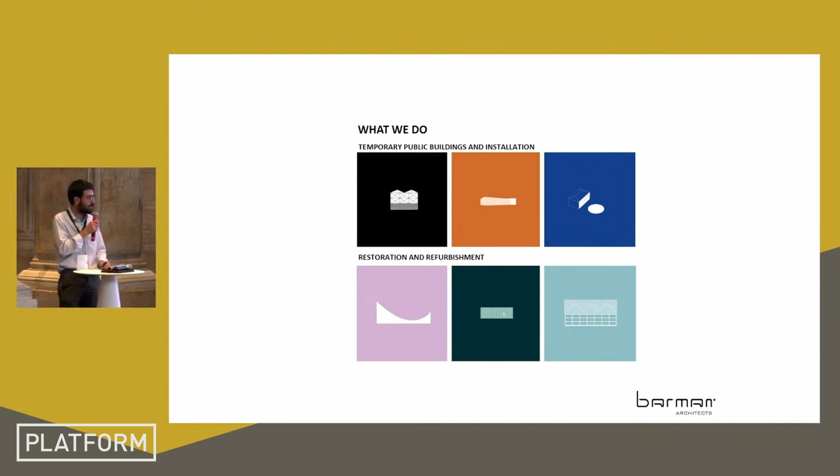My name is Giulio Mangano. I'm a partner of Barman Architects with Roberta Bartolone, who is on my right in the picture and in the audience there. We are a practice based in Venice, and our focus is mainly on temporary public buildings and installations and restoration and refurbishment projects.

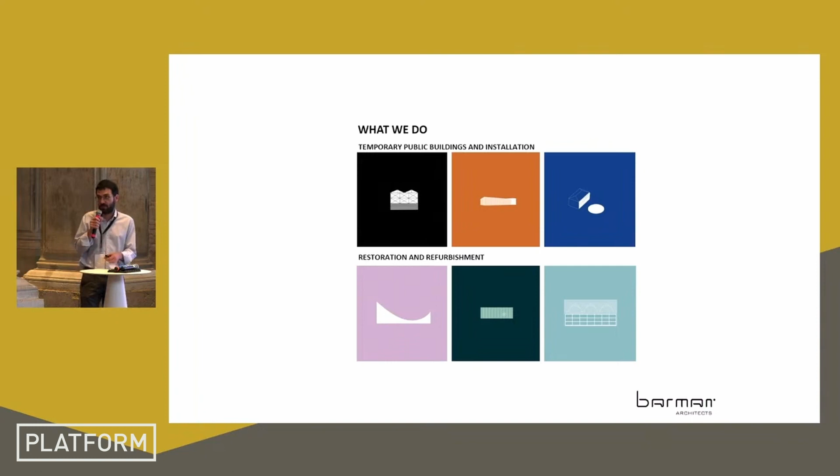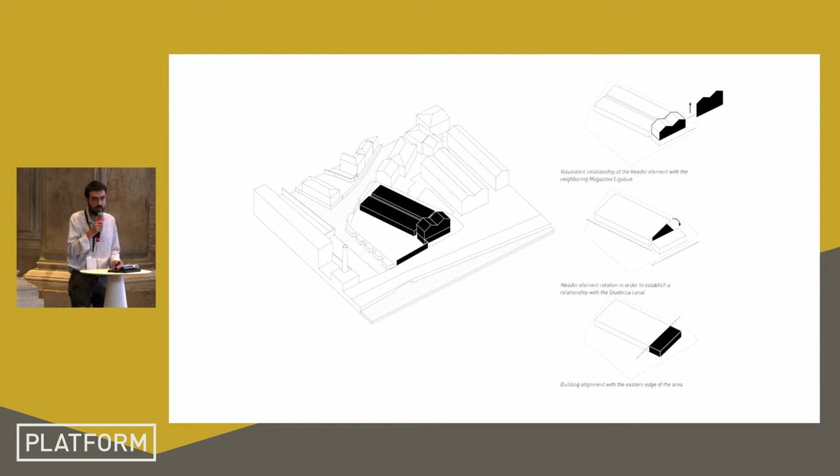Since the beginning and in our everyday practice, we deal with the theme we are today called here to speak about, like the new together. And in every project, as architects, when we approach a new building, we also come together with the limits of the project we face, limits and opportunities given by the clients or the users of our buildings, and the scale of the city.

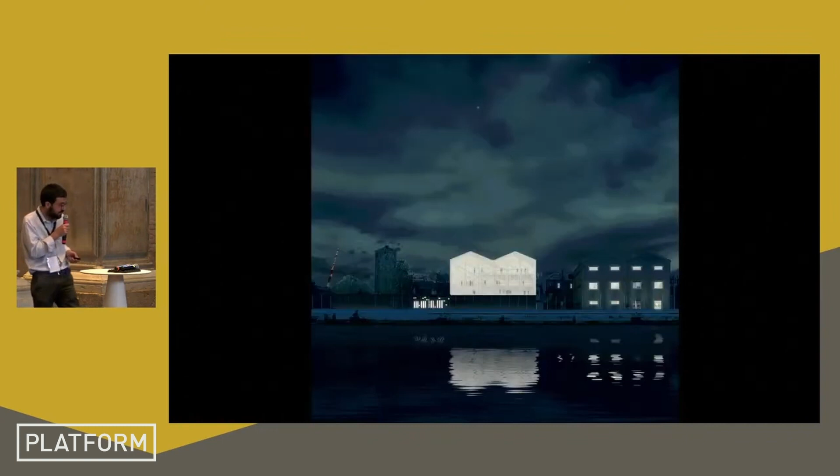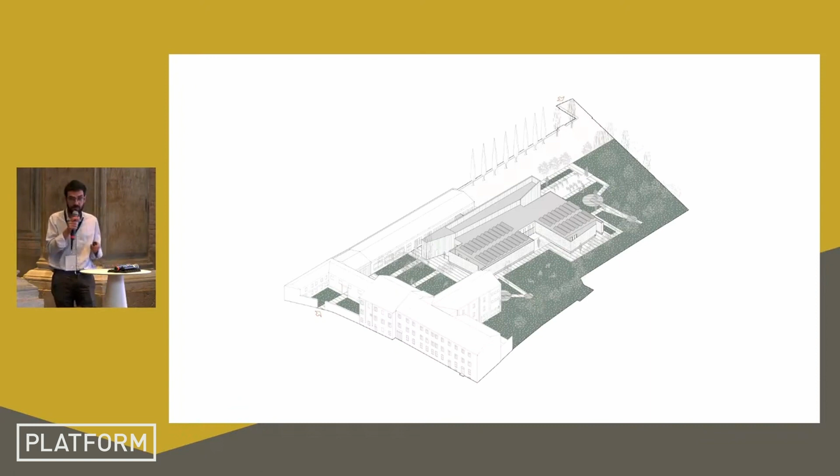And this is a project for a temporary campus here in Venice, done in 2017. And you see here a few pictures. And also the limit I was saying about history: we have to somehow be confronted with the history and the new use of the architecture we make.

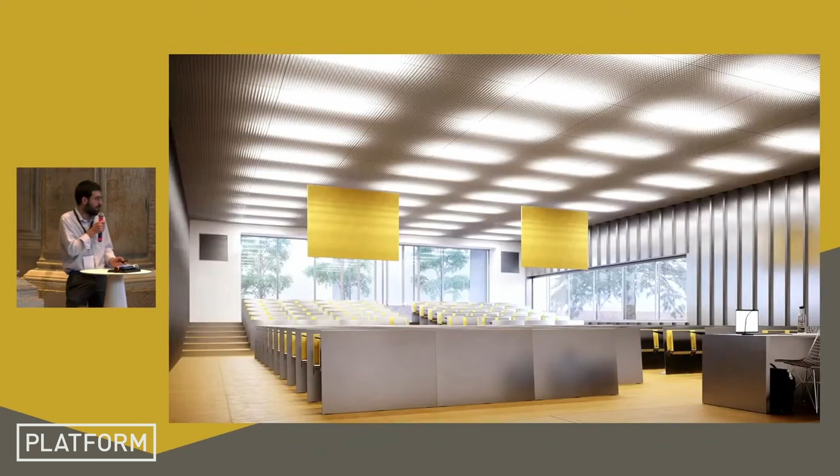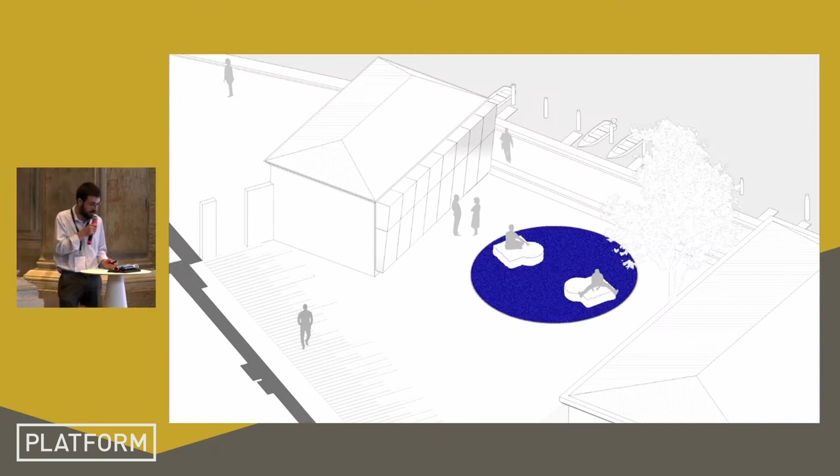Also, working with temporary architecture has something to do with the budget and the time. Because from time to time we build installations or buildings that stand for a very little time, and the budget is always a constraint. This, for instance, is an installation we did close to Arsenale. And it is done with the leftovers of the first boat show that was done here in Venice.

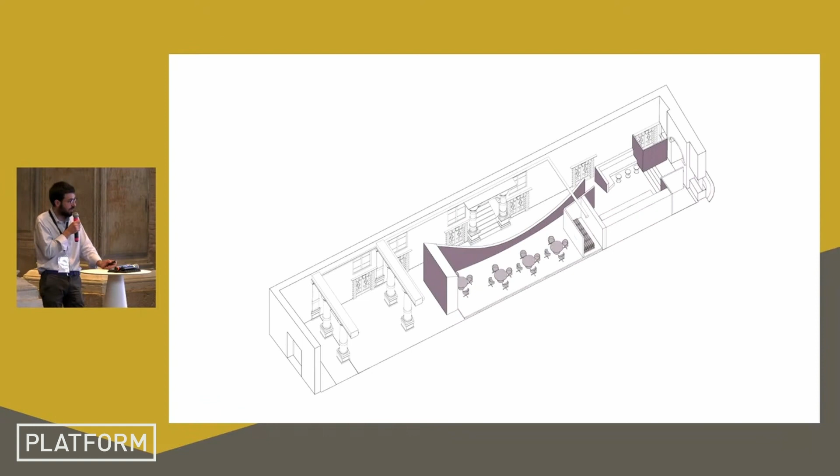Same thing when we have to deal with the limit of the historical presence. When we work in a historical building, there is usually the approach to a new use of a building instead of the historical uses. And of course, it's important to understand also how to give back a life to these old buildings.

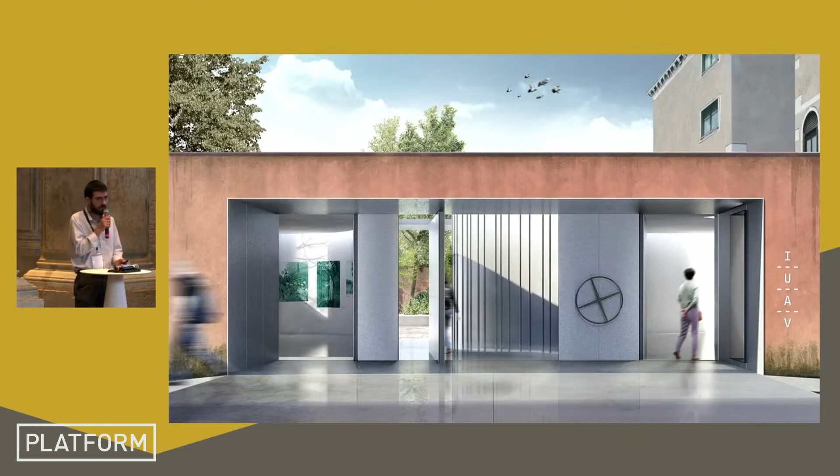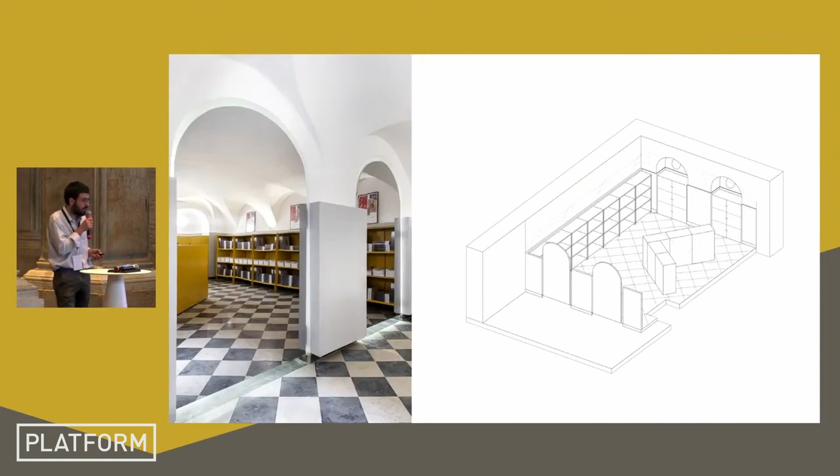I will scroll the images, and I will jump directly to the project we are presenting today at Casa Platform. It's a project that started in 2018, and it's this one. This is a building that was installed in 2018, designed by IUAV in Riva Sette Martiri, and it was a pavilion that was programmed to stay there for 2 months, and after that was programmed to be dismantled and treated as waste, basically.

So in agreement with the municipality of Corbola, which is a small municipality close to Rovigo in the south part of the Veneto region, we decided to adopt it and transform it into something else in order to give this pavilion a new life. The needs of the municipality were to provide a space to host pieces from the local archaeological museum, and also an area for small cultural events of the city. We are speaking of a village, about 3,000 people living there.

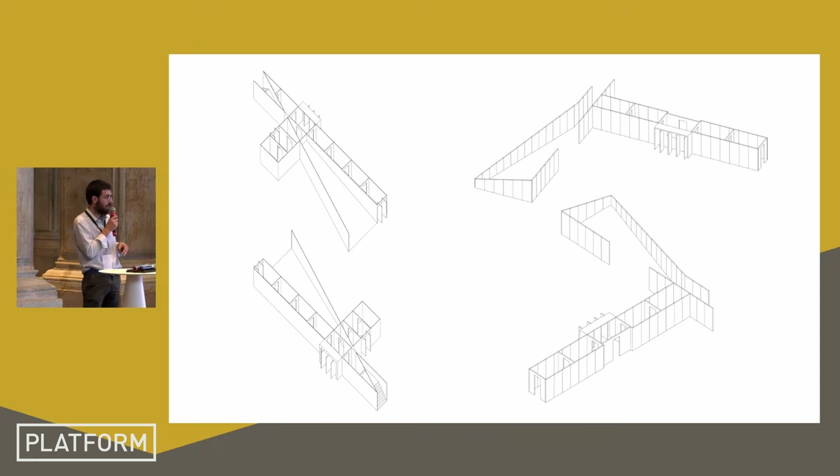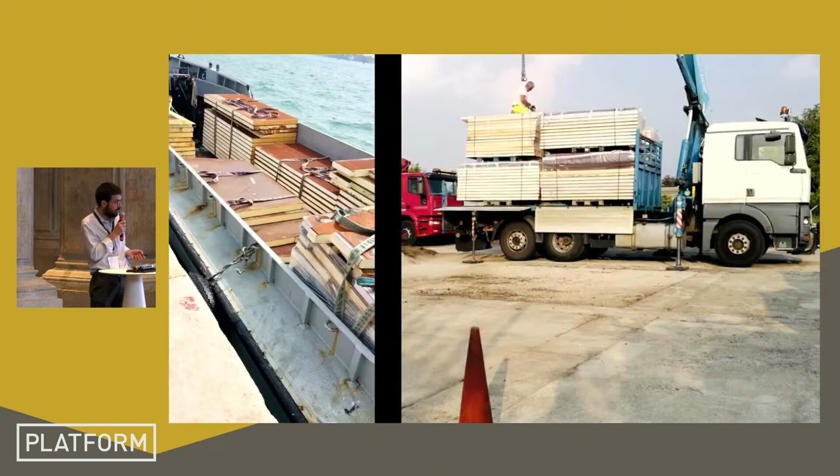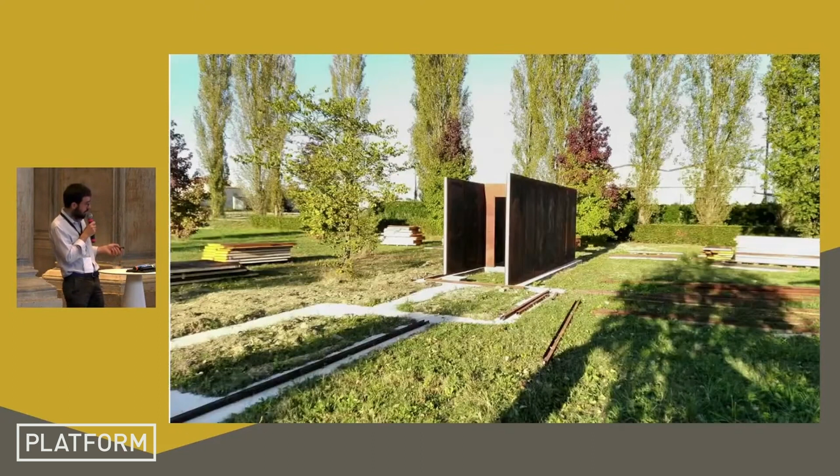So we cataloged all the pieces and redesigned them in collaboration with the municipality in order to give a new shape. So the pavilion was dismantled, moved by water and truck, and put together again in this new plot, which was an abandoned plot in Corbola. And here you see the phases of the reconstruction. It's taking 2 minutes here. It took like 4 years to do this, because it started in 2019 and it ended last year.

So this was the opportunity for us to establish a communication with some cultural institutions in order to provide a new approach to this problem of wasted material from temporary structures. And we started this program called MEPART in cooperation with the IUAV University, and now we are partnering with other institutions here in the city. These are the pictures of the new pavilion. I will leave you with a video that explains a little bit more about the process.

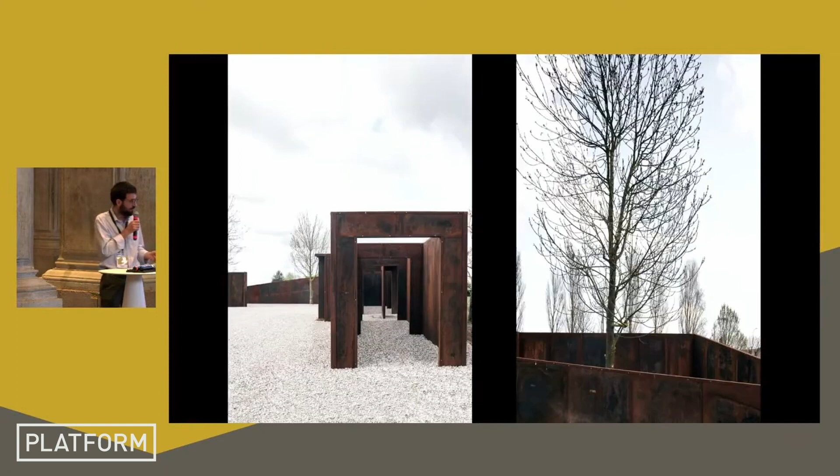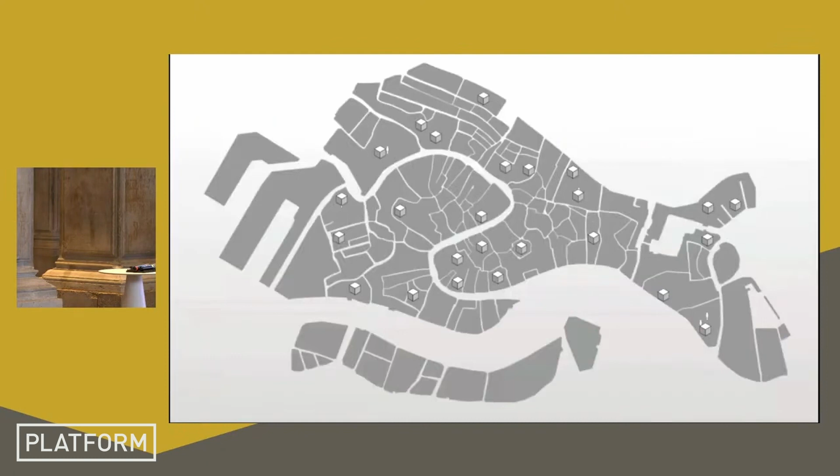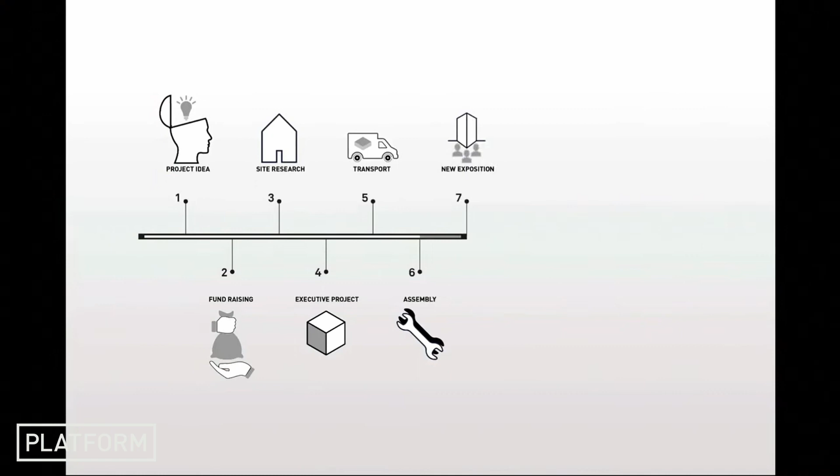Temporary international exhibitions are ever more a solid reality. There have been lots of them all over the world from 2010 until nowadays. They create different polarities, which attract people to new temporary structures, whether those are simple installations or even pavilions. Usually, the life cycle of temporary structures goes from the preliminary idea to demolition. Which is the problem then? Temporary exhibitions produce tons of construction and demolition waste per year. Is recycling the best answer? Most of the time, recycling creates products of lower value than the original one. It isn't closed-loop recycling; we call it downcycling.

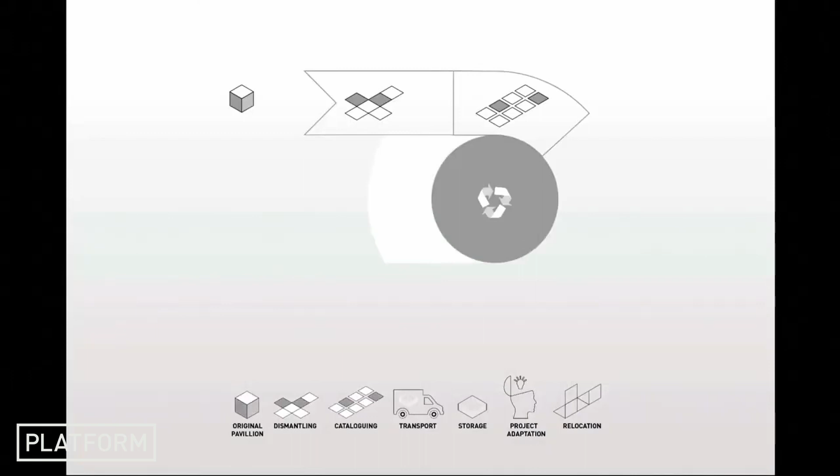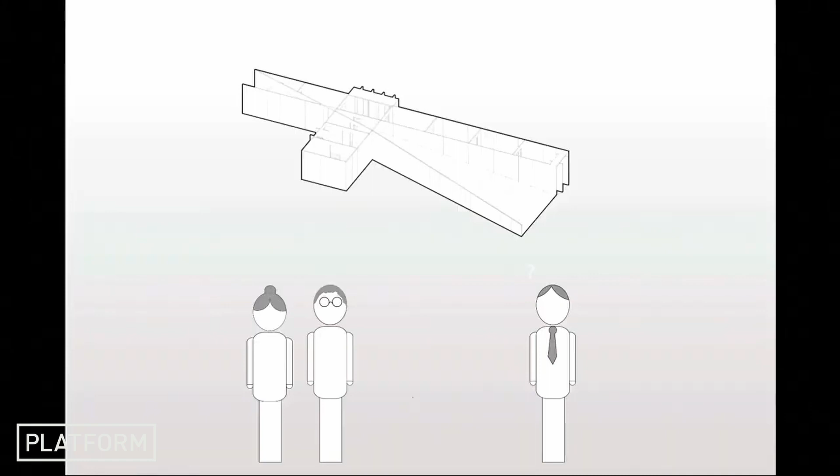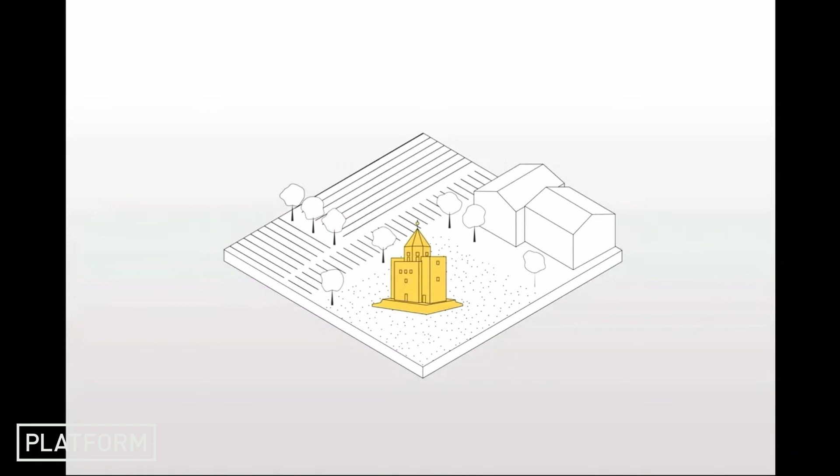The goal is to reuse materials of the original installation and to obtain manufacts of the same value or even more. That's upcycling. How can we make it? Thinking about the project in terms of a reusable materials catalog. Professionals, before the installation is built, produce a catalog and upload it to the MEPART website. By doing that, they enlarge the available material database. Very important is providing opportunities for users and making it easy and accessible. Then a deal is made. The client explains the main interests and needs to local designers, and step by step the structure is modified to better respond to the environment. Thanks to an early communication of the available materials, the new site can already be chosen and the structure can be redesigned in advance. By doing this, there's no need to find a warehouse, and the transport involved in the storage process can be avoided.

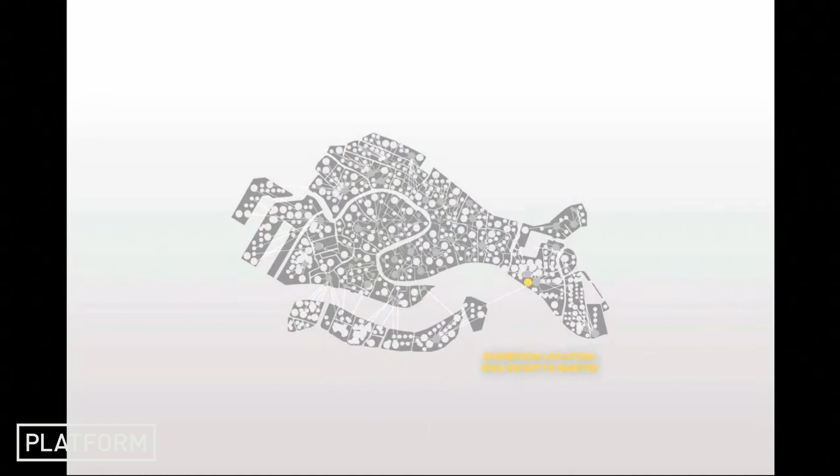This process can be an opportunity to take advantage of these structures, so they could be the trigger for social cohesion and new activities in the city. It is definitely a big step towards the reduction of consumption and the making of a better future.